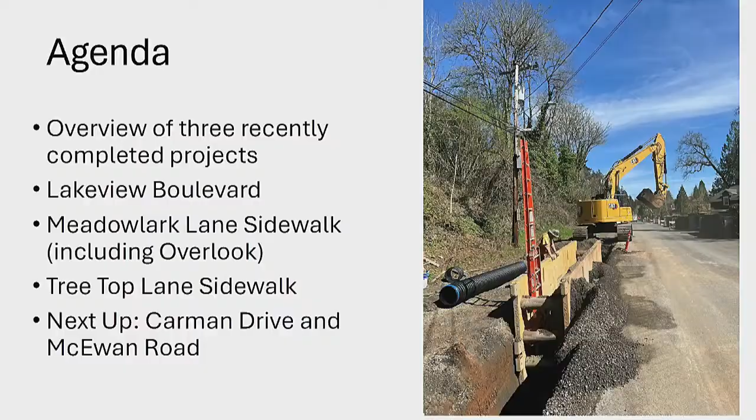These projects align with City Council goals and community priorities to improve transportation connections, mobility, and safety for all travelers and all types of trips in Lake Oswego, with a council initiative to continue construction of sidewalks and pathways, focusing on safe routes to school. Based on that, we are here to present a brief update of what we've accomplished last year.

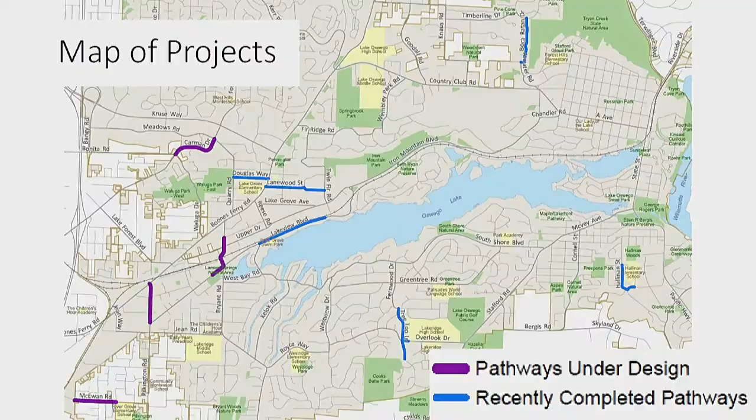Let's jump right into Lakeview Boulevard. This project kept us on our toes for most of 2025. The project was fully funded in our capital improvement plan with funds coming out of stormwater and street funds. We started design in 2022 by hiring an engineering consultant, Consor. The project extends from South Shore Boulevard to Iron Mountain roundabout. The full scope includes nearly half a mile of new concrete sidewalk, close to 1 mile of reconstructed roadway, new stormwater pipe, catch basins, and a new stormwater treatment system.

Almost exactly 1 year ago, we hired a contractor to construct the project. The contractor was selected based on lowest bid, COBID points, and additionally demonstration that they were qualified to handle a project of this magnitude, to ensure timely completion before the start of wet weather. Knife River was the winning contractor.

Before we get started with pretty pictures, I need to mention the importance of consistent communication and outreach to the public.

This project in particular experienced constantly changing traffic patterns. Our communication specialist, Katy Kirkman, kept local residents and the public well informed via targeted outreach to directly impacted folks, but also via public service announcements, done via email, phone, social media, and Lake Oswego newsletters. Project and construction activities were also posted on our project website. We had to coordinate with the post office, Republic Services, school districts, swim park, fire, and police. Contractor coordination also often included managing large parties some residents had, and weddings, which wasn't always easy.

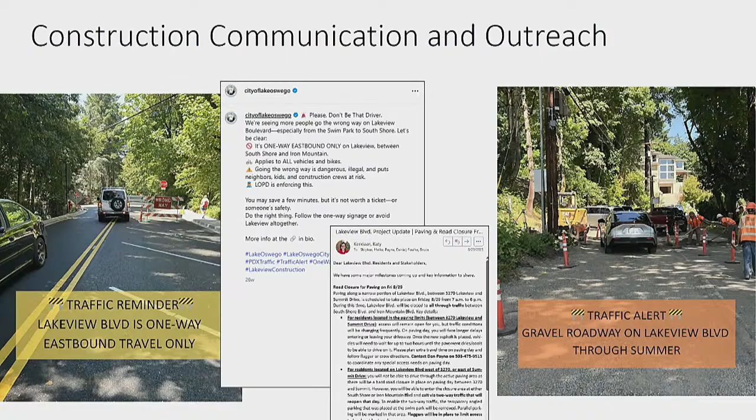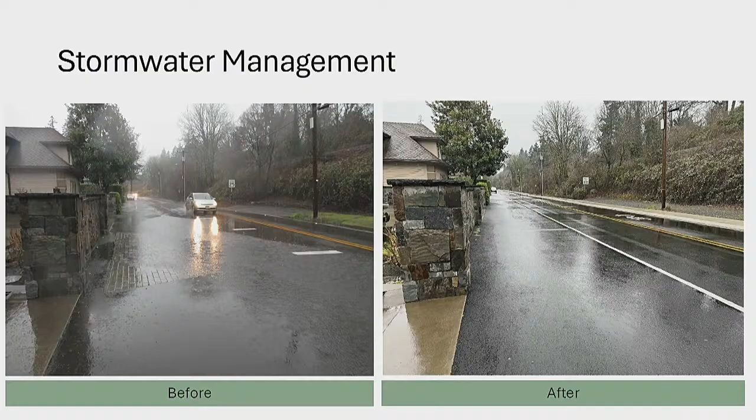But we made it. While a lasting pavement surface was one of the major objectives of this project, stormwater management was the other. Frequent flooding of the roadway was observed prior to construction. The picture on the left shows an extra large puddle on a particularly miserable day. The new pavement surface, shown on the right, sheds away from the residences towards the sidewalk curb and catch basins. The catch basins then send all the stormwater to the newly constructed stormwater pipe, which then sends it on to our treatment facility, shown here.

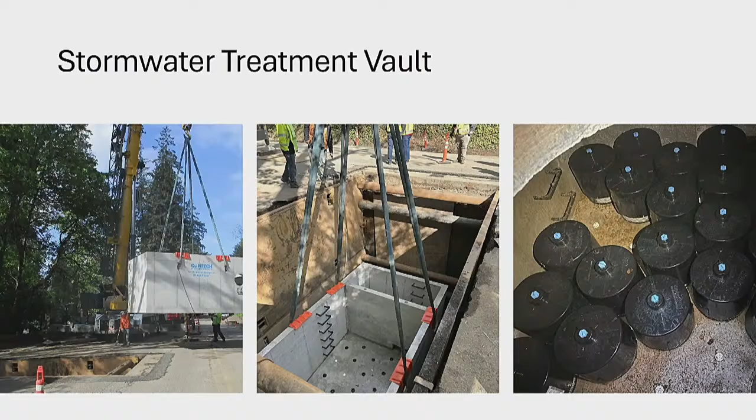This stormwater treatment vault was placed in the parking lot underneath the Lake Grove Swim Park. A large crane was used to lift the stormwater vault into the 16-foot deep excavation. Lakeview had to be fully closed during setup of the crane and installation of the vault for about an hour and a half, and this had to be fine-tuned with resident schedules and school traffic buses.

We then placed 21 storm filter cartridges to ensure that the water that will flow into the lake is treated prior to discharge.

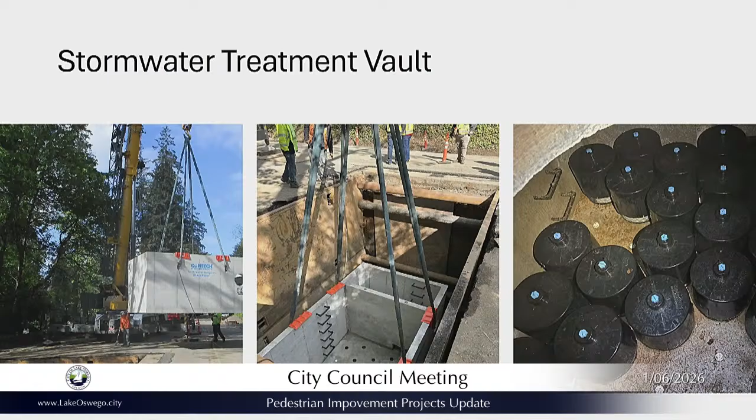Do you have to change those cartridges every so often? Yeah, our stormwater crew will have to. But I made sure they have a little extra headroom in there, because often they don't have headroom. It's like 4.5 feet tall, and they have to climb in there. Wow.

Approximately half a mile of new sidewalk replaced the former shoulder walkway, and a new raised, more visible mid-block crossing at the Lake Grove Swim Park improved safety for pedestrians, especially during the summer swim park use.

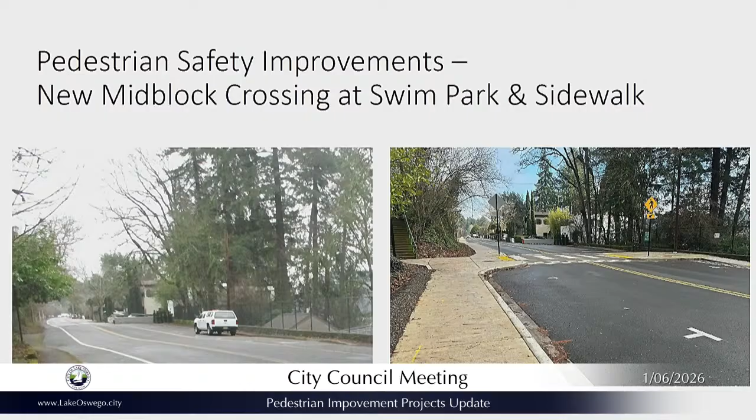Originally, we had hoped to provide a sidewalk throughout the entire corridor. Unfortunately, this was found to be infeasible. Therefore, the sidewalk ends at the Gooden easement. The design team came up with some smaller scale solutions that improved overall conditions. I'll show you some of that, but these solutions included trimming vegetation, removal of roadside hazards, and adding signage and pavement markings.

One of the challenges of the project was the curve safety improvements, which you can see in these photos. First, the challenge started out with a legal agreement allowing the permanent alteration of the adjacent property due to the required removal of a large Douglas fir tree.

Thanks to the council directive to further look into this matter and see what it would take to remove the rock outcrop, we were actually able to add the scope during construction, after reaching an agreement with the homeowner. It took some extra time, but in the end, we were able to remove a couple of large trees and bedrock to allow for some extra shoulder space for pedestrians to get through this narrow area.

Residents had to endure the noise and sometimes vibration of the equipment during rock excavation. We also added some striping, profiled high reflective fog line and reflective pavement markers throughout the corridor for better visibility at night.

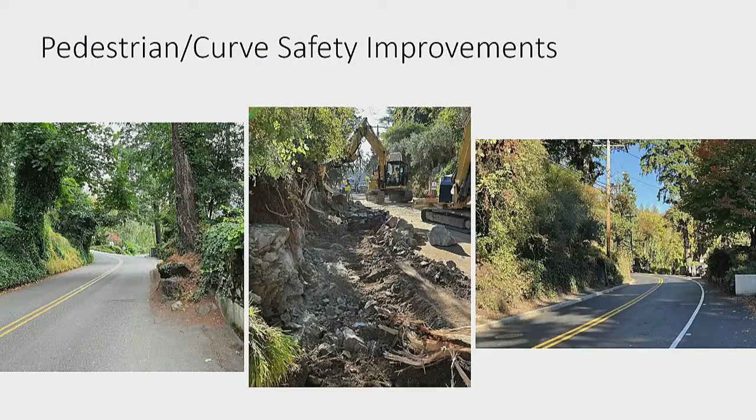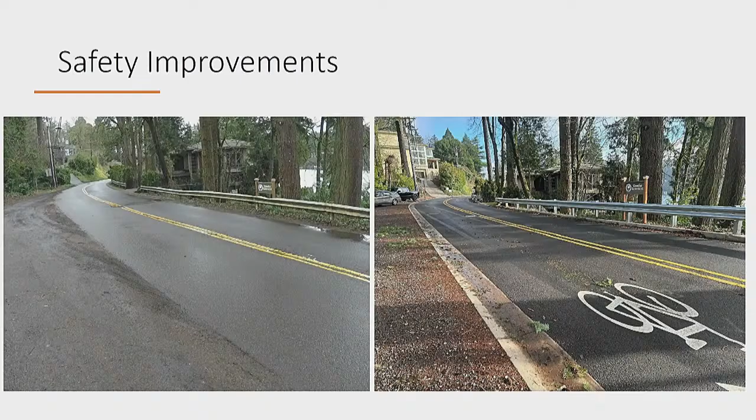We replaced the old guardrail at the Gooden easement, which proved to be challenging due to boulders serving as a retaining wall adjacent to the Gooden walkway. Curb was also added to the roadway to direct stormwater into catch basins.

Here's some final project statistics. Total construction cost was $4.8 million. We added about half a mile of new sidewalk, 8 new ADA curb ramps, nearly a mile of new pavement, 3,630 feet of new stormwater pipe, and 25 catch basins.

We managed to do some improvement at the railroad crossing. That held us up for a while because the railroad initially proposed that they would replace the crossing with a nice concrete crossing, but in the end, they proved to be too busy to follow through with that.

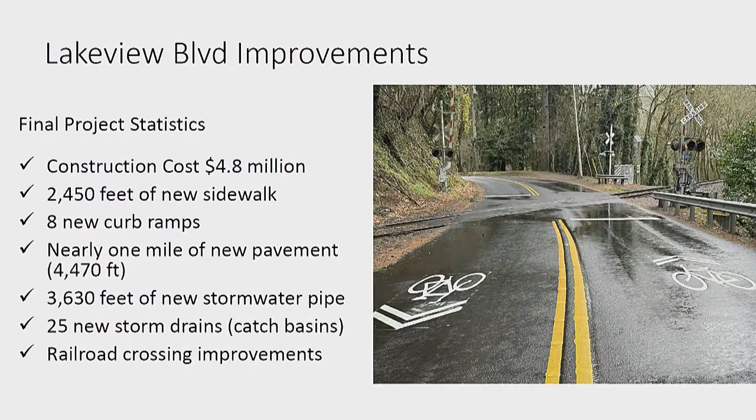Let's move on to our treetop and meadowlark sidewalk projects. Both projects were fully funded in our CIP, Capital Improvement Plan. The goal was to finish the upper part of treetop before the beginning of school. We also added a short 200-foot section along Overlook Drive after our first public meeting, where we got feedback that the connection from Meadowlark to Overlook was really a missing gap, so we added that as well. Total length of sidewalk on treetop was approximately 1,400 feet, and Meadowlark and Overlook was almost 900 feet.

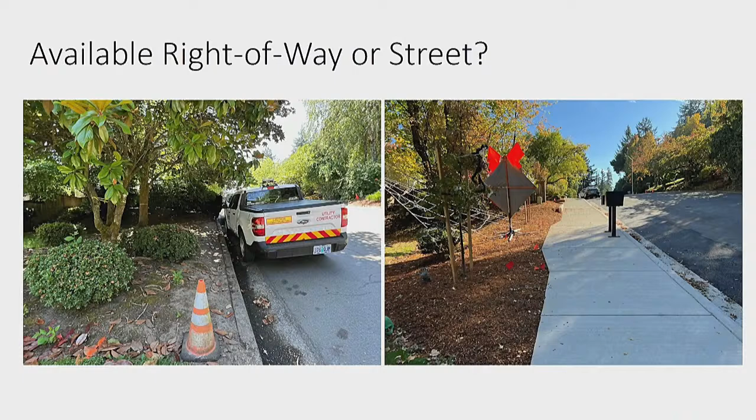Before I dive into some project photos, I'd like to briefly talk about how these projects get started. One of the first decisions that needs to be made is where the sidewalk is going to go, and whether we have enough right-of-way. We first meet with the public and affected residents to hear their observations and key concerns, and try to incorporate their feedback as much as we can. The general public perception is that the property line starts at the existing roadway, and there's often confusion that requires education. Going into the street or towards the property also depends on street classification, and often the need for parking.

Here's some photos of the treetop sidewalk before, after, and during. We ended up going into the street because of existing utilities and the large impact on existing driveways and front yards and properties. Stormwater also became more of a concern, and streetlights would have to be moved, so we went out into the street.

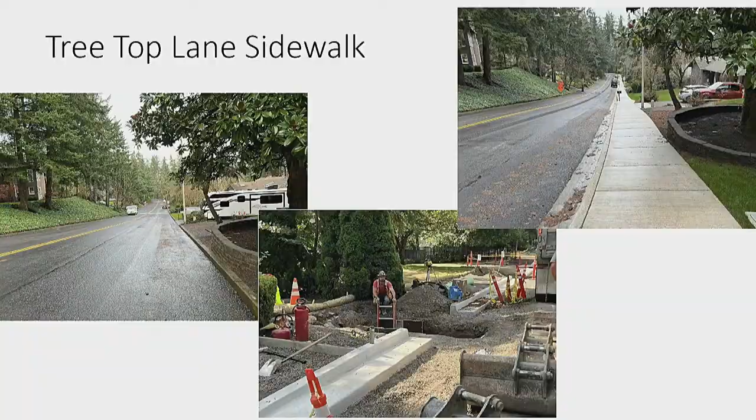Construction work is full of little problems to solve each day, whether it's how to keep access for electric vehicles to charge while the concrete is curing, or make sure guests of an Airbnb have unrestricted access. During this project, we had some last-minute changes in plans to accommodate those cases, electric vehicles and Airbnbs, and so our contractor always needs to be flexible, pouring driveways in 2 halves to ensure that. You can also see in the picture on the right that driveway required extensive brickwork, and it also has exposed concrete aggregate that needed to be matched, which caused quite a bit of delay and sometimes frustration, but it all worked out great in the end.

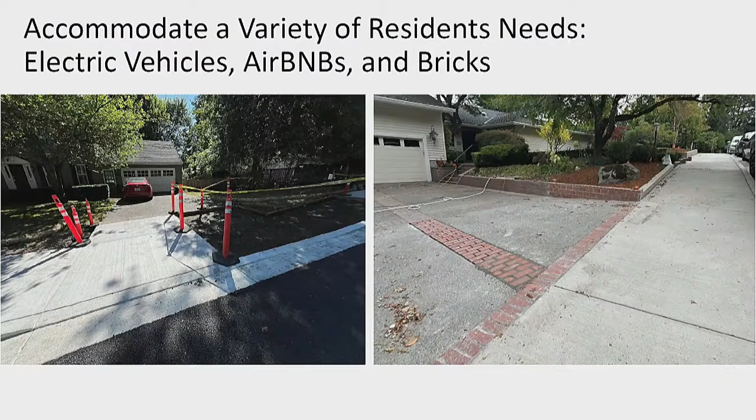Your microphone. They need their charger at night, and concrete takes about a week to cure. So when those people can't access their charger for a full week, they have a problem. Got it.

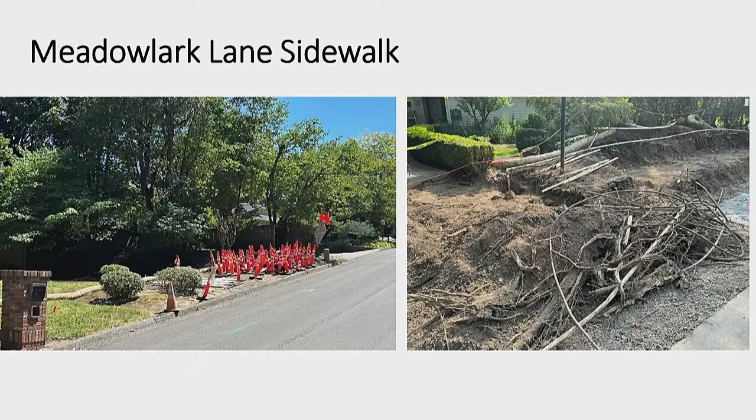These photos show that construction can be messy and disrupting, and things might temporarily not look pretty. The photo on the right shows demolition, tree removal, roots exposed, broken irrigation lines, broken water meter line, everything happened there. You can faintly see the orange line in the background - that's a Comcast cable that was exposed, but that's reality.

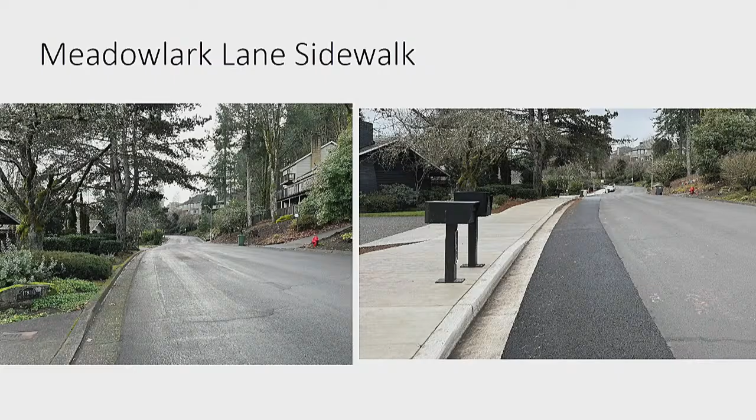Here are a couple of before and after shots of the sidewalk along Meadowlark Lane. The sidewalk was constructed going toward the residents. A priority of the neighbors was to keep as much street parking available as possible. Along Meadowlark, we still have mostly parking on both sides, except in a small area where the sidewalk bumps out into the street to save a large ponderosa pine and ancient Japanese maple tree species. As previously discussed, an additional 200 feet of sidewalk was added along Overlook to close the gap. This ended up being a great addition to the project - it's really my favorite there.

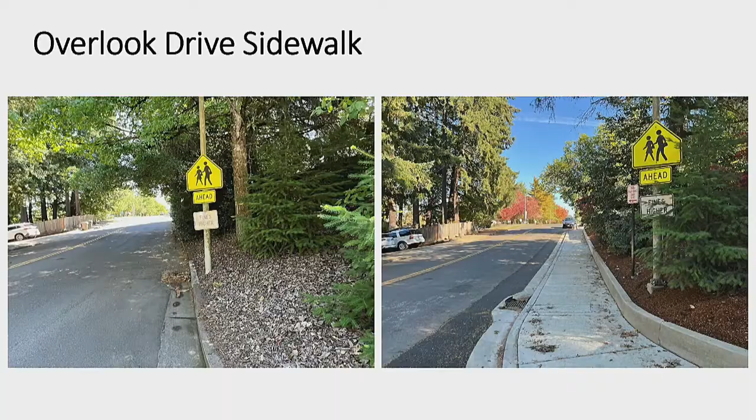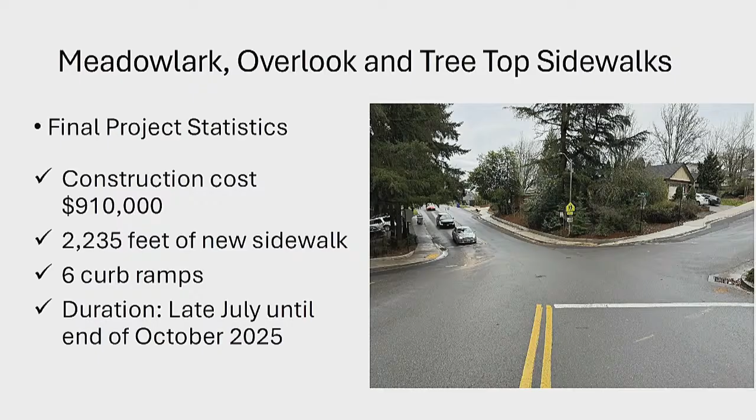Final stats: construction of all 3 segments was just under $1 million. All in all, it was nearly half a mile of new sidewalk, 6 curb ramps, and we got that done without impacting school traffic too much.

Next up, Carman Drive, Pilkington, and McEwan Road. We have just selected a contractor for the Carman Drive sidewalk construction. This will be on the consent agenda for approval during one of the next council meetings. Pilkington Road sidewalk should be completed later this year - there we were being held up by a property dispute and dedication. And the design for the McEwan sidewalk near River Grove Elementary is being finalized, and we anticipate construction this summer.

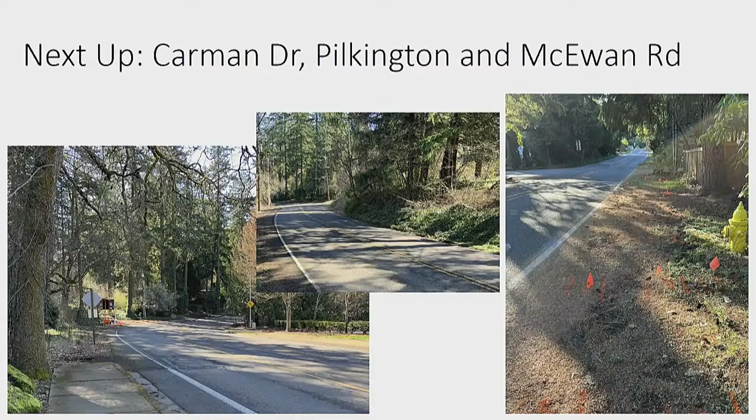Thank you very much for the presentation. It highlights how much, in addition to the complicated construction work these projects entail, there's also complicated and involved communication required. I want to tell you we hear very little from residents, which is a good thing, and what we do hear is very positive. People are very positive about these improvements in their neighborhoods and the cooperative way that you work with them. People really appreciate it, and it goes a long way. Thank you very much.

I'm curious, have we been working with some of the same contractors on these projects, or has it been a whole variety? We have worked with Turney now 2-3 times out of 6-7 projects. Other than that, it was always different ones. And now with Carman Drive, we had 16 contractors bid on the project.

Wow, they're hungry. Is it ever helpful working, as we're doing these projects every year, with the same people? If they're a good contractor, then yes, it's helpful, and Turney does an amazing job, and they know our expectations. It's nice to have a contractor who is really accommodating because residents come out all the time to talk to them about this plant or this going on, and I think it's good for them to want to listen and be respectful and always kind.

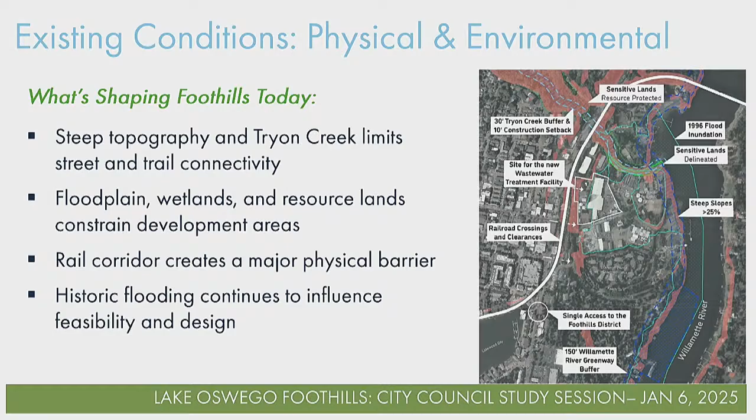And flooding, the 1996 images are amazing to look at and see the extent of how far that water reached, primarily coming in from Tryon Creek, not the Willamette flooding over into Foothills, but working its way near the wastewater treatment plant. These are really good datum lines and points of reference for us. What's shaping the Foothills today?

The limited access is a real challenge. There's one way in, one way out. It's been that way for a long time, and that has some issues as we think about development long term. Emergency access, the ability to get in and out, access not only to the park but also to future development, needs additional access to really be a viable development area.

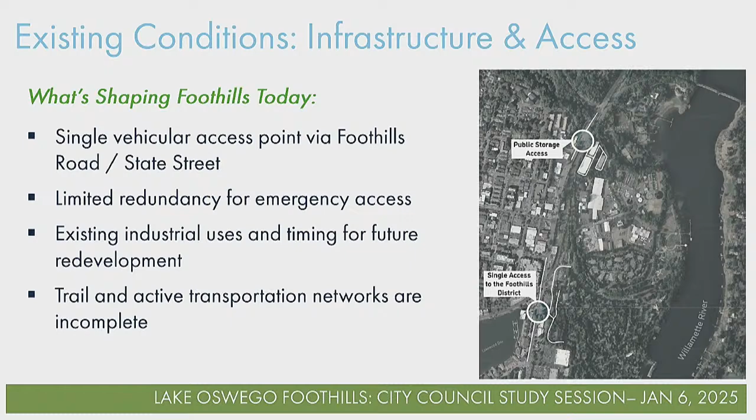I think the trail and active transportation networks are one of the most exciting things because you've done some of the work of acquiring those additional right-of-ways to connect George Rogers to Foothills Park. So I feel like that's already a trajectory that's a real positive. We're hoping to feed more into the walk-bike connections that feed not only along the river, but between the river and downtown.

We've also interviewed a number of developers. This is to give a perspective of the type of development that's potentially viable in downtown. You've had a lot of great projects happen along First and A. The Anchor project is another one. So these are indicators of what the potential market might be, and it gives us a sense of scale and the type of development that might be in the community.

And so what we hear from developers, it's not new now from probably 2012, but the access improvements are going to be really important for redevelopment to be attractive in the foothills. Having good access points in and out are important. How the floodplain is addressed, how that's mitigated, whether it's fill, having a clear path for that is going to be important. And then the infrastructure costs, how much of that will be on the development community, how much might be a catalyst project that the city can initiate. So understanding those parameters are important from a development perspective.

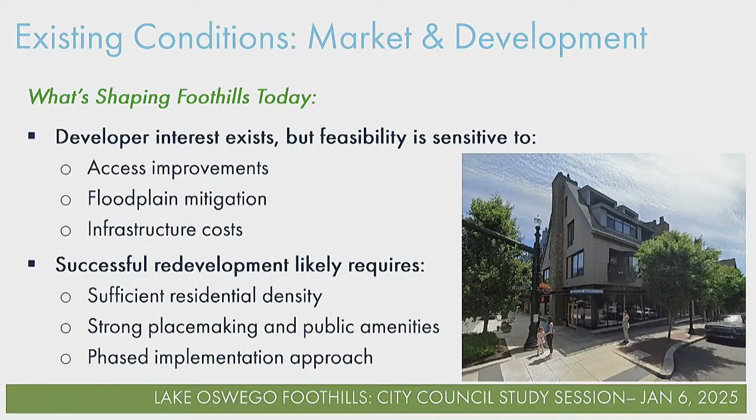And then, of course, as we think about density and intensity and types of development, you're poised for increased density in this district. What that is to be determined, but we know housing is also an aspect of that. And with housing, placemaking becomes really important because people want to be in a place that's desirable. Mixed-use development, if that's an opportunity, what we're hearing is it really needs to create the riverfront as a destination. So even if there's a limited amount of commercial, having it river-oriented, river-facing, having housing development river-facing, having Foothills Park be a part of the experience, all those parts coming together are going to be critically important for success. So what limits redevelopment potential?

I mean, I can talk about access all day. You can see a number of arrows here where we've been looking at potential ways to come in and out of the district, whether it's through existing uses or aligning with Terwilliger. The wastewater treatment facility is moving from one location to another, and so we've been testing sort of paths. Is there an ability to weave between the new and the old facility? So those are considerations for us.

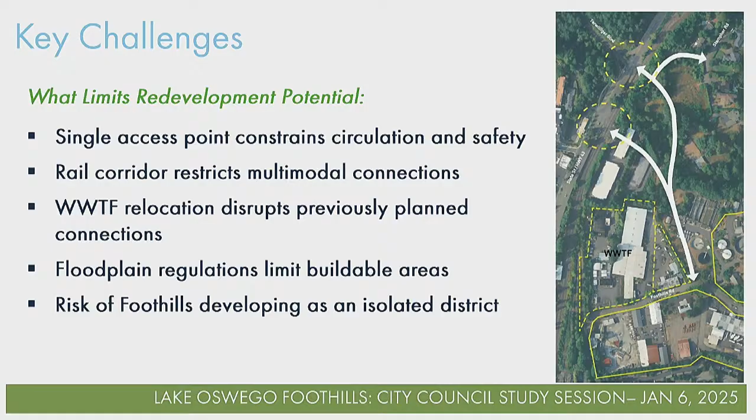And I mentioned floodplain, buildable areas, and this access thing is going to be really critical because we can't really have an isolated district. There's always opportunities. The secondary access would be great.

Can I ask a quick question? Sure, absolutely. So, John, go back to the previous slide, please. So are those real possibilities, or is that dreaming?

Well, everything's a dream, pretty much. Yes, everything is cost. Cost will play a factor. There's a number of constraints here. The rail, we'll say that's fundamental. You do have a crossing today on that lower arrow going through that white building. That feeds to the public storage units today. You don't have a connection at Terwilliger that you see in the other arrow. But the trade-offs are like, what are the benefits of one location versus another?

So the 2012 plan said, let's go through the path that's through the public storage units. So that's an acquisition of property and trying to weave a road through that. That's at grade, so the rail line and State Street are at the same level. So from an engineering perspective, that's pretty good. But then you have the cost of purchasing property and weaving your way through. What Terwilliger does is it aligns you.

The other issue with the potential public storage location is it's between Terwilliger, which is a signalized intersection, and D Street, and it's in between. So it's a little complicated to get a new signal in there so we can get in and out of the district. It can be done, but it's going to cause some other streets to limit access, right-ins, right-outs, those types of things for the Terwilliger intersection to work.

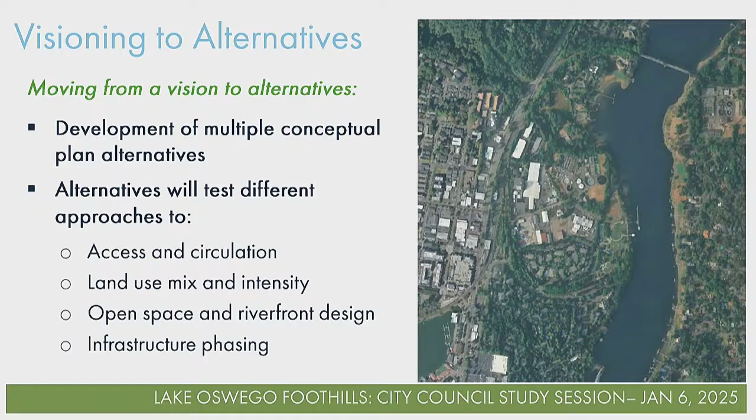That's really outlined there. As we move from vision to alternatives—I've mentioned the vision, I've mentioned the guiding principles—we'll be using that to create conceptual plan alternatives. That'll include additional access, a road network, mapping along property lines and existing businesses, and determining opportunities for a variety of land uses: housing, some commercial, expansion of Foothills Park. All of those things will be part of the scenarios we'll be developing. By the end of March, around April, there'll be some great viewing time for those initial scenarios.

I guess I should begin by asking if there were any questions about the initial presentation from Jason, anything we talked about, the general overview of some of the recent work we've done, and the findings from our inventory and analysis work. Are there any questions before we get more in-depth here? No, go ahead. Okay, keep going.

Thank you. As Jason pointed out, we have about five different topics we really wanted to focus on with you today, thinking about how to best utilize your time rather than just reporting out what we already know about the district. We've already been through a large process as a city, at least 10, 15 years ago, that a lot of us are familiar with. But there's extensive reporting for you to review—a very long set of technical documents that we've distributed along with your packet.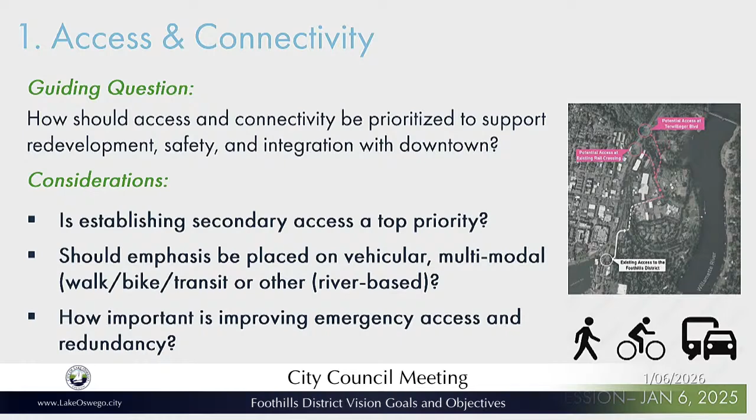Of course, the primary question—if not one of the primary questions, potentially the primary question—is how should access and connectivity be prioritized to support redevelopment, safety, and integration with downtown.

This might be somewhat of a no-brainer, but we want to be clear that this is a priority before we move forward, because it will have an impact on the visioning we do eventually for this area. So the first question is: is establishing secondary access a top priority? Do you have any thoughts you can share on that?

You feel the advisory group so far feels pretty strongly about this secondary access being key? Oh yeah, I don't know how you could do it without it. Okay, great. But I also think some of these might be so obvious as to not require much conversation, and I think that's a good thing.

It's obvious if it's $150 million, it's pretty obvious we won't be doing it. Yes, we'll get to that part. Let's go through conceptually, if we're dreamers. Yeah, we'll get to that. Let's get through this, and then we'll want to transport back in time to when we approved the RFP for this project, and you told us all to dream big and not be too weighed down by that.

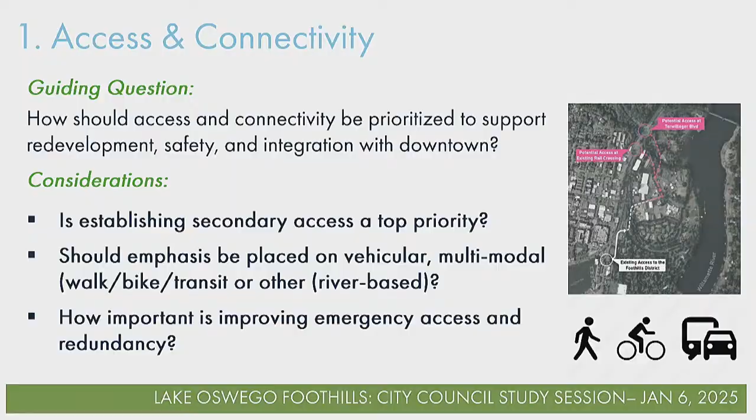Yeah, I think it's really important that we have that access, and I think we're not going to see vehicular access through like A or B. It's going to be on the north end, so we need some pedestrian access that really connects the main downtown with foothills. In addition to the trails, which are fantastic, we need that flow of how people get down there without always using a car. So how do we really focus on that?

I think in 2012, didn't they have like a stairway or something? Yeah, there was some sort of Spanish Steps inspired entrance. I don't know if that's right or not, but I think that's critical to bring the flow of people between the two areas.

Yeah, it has to encompass one flow of the two areas, so that it's a whole. You wouldn't want to have to park down there to go down there and park up here for another thing. You can park here and it's one experience.

We're going to talk next about economic development strategy, but one thing that came out of that is improvements to B Avenue with the North Anchor project. So how does that tie into these improvements, and how do we create this one experience? Because we didn't do a lot of pedestrian improvements to downtown, aside from some streetscape. So it's one of our trickier connections in town for bike and ped connection. And of course Highway 43, the one state-owned highway going through town, adds jurisdictional issues as an additional challenge. So it's foothills, but then also a few blocks into the downtown.

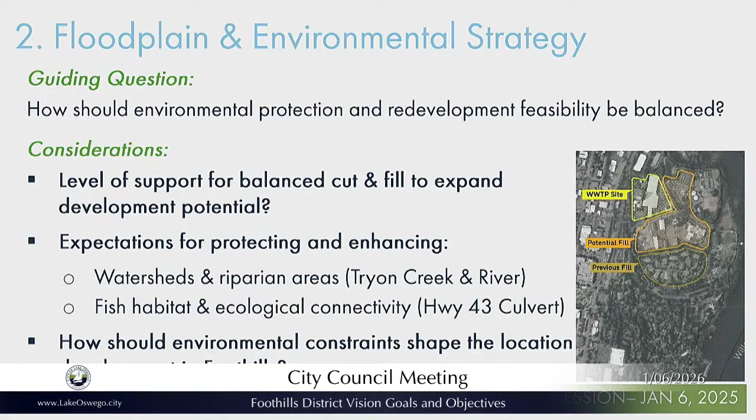Yeah, so the cut and fill concept is that flooding needs somewhere to go - low-lying areas - and as you take low-lying areas out, you're exacerbating the flooding issue. You could put in a wall, for instance, but that would back up and cause other issues. The wastewater treatment plant itself, the area we're relocating it to, a portion of that is out of the floodplain and some of it is not, so they'll need to level that surface and put some fill in.

What we found is that previous work done on Foothills Park lowered the park and created a larger area for flooding to move into that zone, increasing capacity from 1996. The wastewater treatment plant is going to use some of those balanced cut and fills as they level their area - there are credits given by Foothills Park for that. As the old wastewater treatment facility moves, we have this mound, some of which is bedrock, and that's a location where we can take soil to create more flood capacity, putting that fill into another lower part to raise it up.

The image on the wall, which you probably have in front of you, is a good example of the cut and fill. The previous fill, the Lake Oswego Point condominiums, is all area that was raised up four or five feet for that housing project. That was outside of the flood in '96 - they were high and dry, which is great. It's a similar concept. In that yellow area between the previous fill and the wastewater treatment site, those are the areas we're looking at bringing in fill, because that would be your redevelopment area outside of the floodplain - not all of it. That yellow line goes up toward Tryon Creek, but we wouldn't be moving that far.

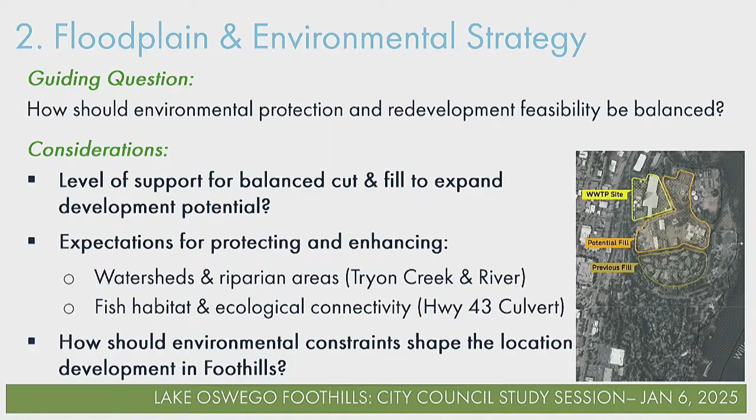So, sorry, too much information. What does cutting where the current wastewater treatment plant is do to the developable potential of that land? Well, you can put some soil on, let's say, the west side to create more of a cone, and you can carve off a side, compress it down, and move soil around so you can create a more contiguous level flat surface. So some of it's just manipulation of something that's conical to have more of a flat surface.

But as I mentioned, bedrock is something that's underneath. Doesn't mean you can't work through bedrock — you can blast that out and create level surfaces from that. Does that answer your question, or do you have something more specific?

I mean, in the areas that we cut, like we did with Foothills Park, then we made that into a park. We didn't build there. You can't build exactly there, so some of that cut then may add more park area, and so the parks plan, which is looking at improvements to Foothills Park — absolutely, we want to look at how that additional cut can contribute to more park space at the same time, and give us fill for the development area.

For development, so, okay. So why would we not? I think this might be another one of those obvious questions — I think we really are strongly leaning towards the sort of district-wide balance of cut and fill, and that's kind of what we're proposing here.

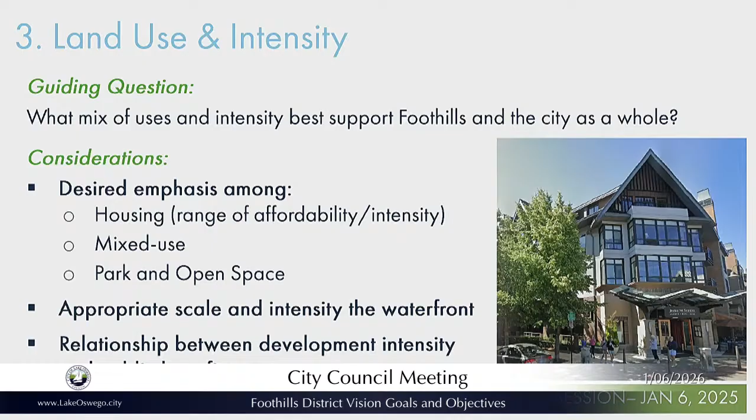No, the general plan is good, other than the fact that, since I've been in this community a long time, there is a shortage of houses for people who want to downsize. I think one of the desirable parts of the 2012 plan was the chance for a mini South Waterfront, though they didn't all want a 10-story building, most people didn't, so things kind of changed on that. But the supply and demand issue is something we're very short of in this community, having a place for people to give up their bigger houses so we can get more kids in the community and get that rotation going, because there's just not a lot of options for people who move.

I'm all for the affordability part too, but we also have to have that element of high-end or higher range opportunities for people to sell their 5,000 square foot house and downsize to a 2,000 or 3,000 square foot condo. It's all proportional in people's minds, but it's highly desirable for a lot of people in this community. We need to be the planners and thinkers, because we're not building as many houses since we don't have the space.

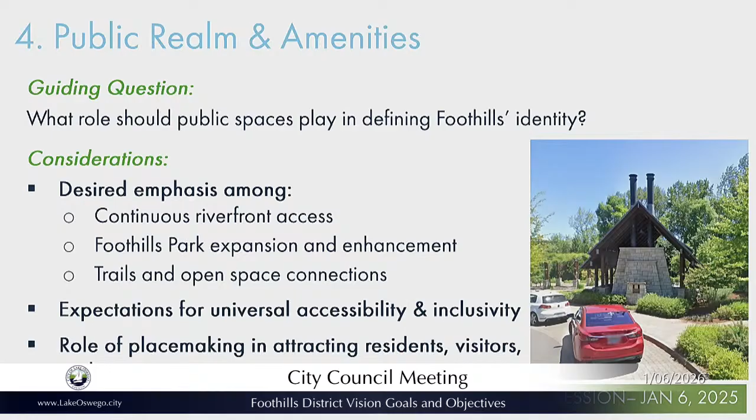And what's that? Okay, yeah, I think we're on the same page here. Yes.

Just talking a little bit more about implementation. Again, this is something we'll consider a lot more in later phases of the project. But as you can imagine, because this effort is being led by the city and not by a group of property owners getting together to spearhead it like last time, it's difficult to anticipate exactly when and how development will unfold in this area once the plan is adopted.

So really, what we've landed on is that there's almost a need, but we're calling it a preference, for both a phased long-term build-out and early catalytic projects that get some investment in the area for infrastructure to start being constructed and to actually finance that piece. It would be great if we had a giant development site ready to go, but this will take some time, particularly with that public storage site on the north access being critical to unlocking a lot of what occurs elsewhere in the district.

So I think we know we need to try to balance these things, and we're looking for your confirmation of that. With the development of the urban renewal plan, we're talking about the types of public investments needed to unlock private development in that area, and different, more flexible approaches. We know we need to be flexible, but there's this question about the sequencing of public investment in this area.

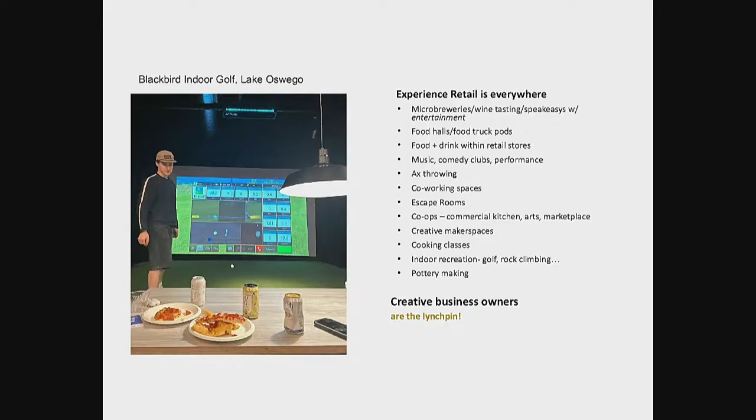Even though the retail base is very vocal in our community, it's relatively small. Of the whole private sector employment base, it's a little over 5%, about a little over 1,000 employees.

Growth and change in that industry is always driven by population and income. Note, e-commerce is increasing, up from 12% in 2020 to 16.3% today. That has had some slight impact on retail demand, but not significant, not in our community.

The space use is changing. You've noticed this. We have an incredible number of personal fitness firms and health-oriented businesses. Restaurants still dominate, which I think is good because they are anchors that will not get lost to e-commerce.

New investment is occurring even with the limited supply of space we have. Only less than 2% vacancy rate is considered full occupancy in most markets. So that's what we're looking at for commercial sites, commercial space.

I'm going to keep going here. I will note that in talking to businesses, they're getting nervous about the economy. The holiday season wasn't quite as good as they had hoped. Foot traffic is probably at the top of the list of retailers. And of course, a lot of issues you've heard before, everything from parking and signage to code enforcement.

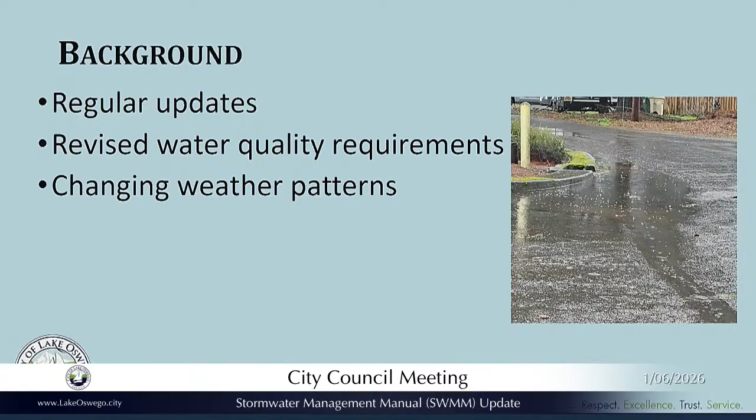When we started this project a couple years ago, we came armed with a list of comments and changes that staff, engineers, and developers had wanted in the manual. They were looking at inconsistencies, things like, I can't find this in the manual, where is it?

And so when we started, we came with that list, and then we hired a consultant to look at what's being required area-wide within the Portland metro area and even into Salem and Eugene, so that what we were asking wouldn't be too onerous for developers and engineers. They would be used to these kinds of requirements and be like, oh yeah, we do that in Portland, it's fine. Or yeah, Clean Water Services makes us do that.

And then we have a great staff. We formed an internal team with staff that has experience in geotechnical areas. We have staff with stormwater expertise, construction management expertise, construction expertise, and plan review.

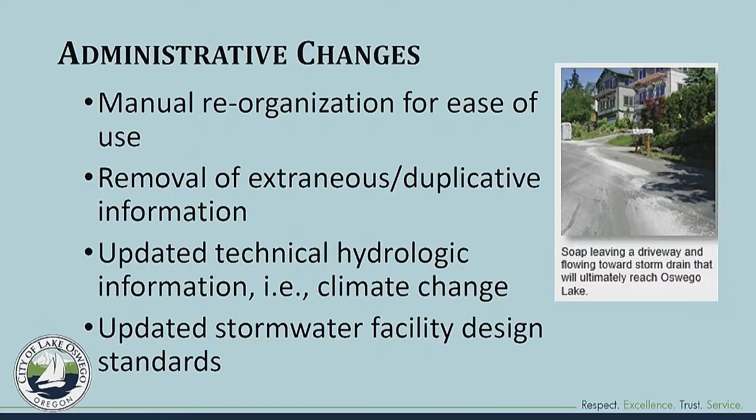Another thing that we did is that we had requirements that were in multiple locations with slightly different language, and so people were coming up with inconsistencies. We took those requirements that were in multiple locations and put them in one location, so you have just one requirement, as opposed to going, well, it says this in this chapter and this in this chapter. Now it's in one chapter in one location, and it'll reduce those inconsistencies, which will make the design faster because people understand what they're being required to do.

The 2025 numbers are based on the last 30 years of local weather station data. We used a station that Portland has in their hydro network up at Nansen Summit. The 2020 numbers, the 2016 numbers, and the 2000 numbers all used data from NOAA, and that data was last updated in 1972, using precipitation data from the 1940s, 50s, and 60s. So things have changed a little bit, and we wanted the latest data to deal with these changing weather patterns.

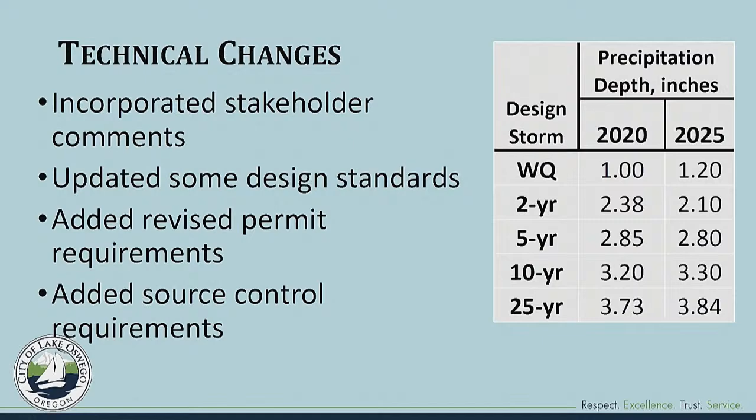There was one other thing I wanted to cover - we added source controls to the new manual. A source control is something like putting a cover on your storage area where you're storing waste materials or raw materials, so precipitation doesn't hit it and become stormwater that goes into our system and into our streams and our lake.

The impact we see this having on engineers and developers is that these larger projects, the 10,000 square feet or more - which when we did the analysis is like 10% of the projects per year - so the vast majority of projects done in the city won't have these increases in design analysis to make sure they're not affecting the adjacent property owner and not adversely affecting our public system because of the water coming off their site.

We'll increase our water quality here in the city because of the treatment required prior to discharging water off-site, and that's actually a DEQ requirement in the latest stormwater permit they handed us. They said all the water that comes off a site needs to be treated before it gets discharged, so we put that into the manual. It'll improve water quality, meaning less sediment going into Oswego Lake. Last summer we had concern about an algal bloom, generally caused by sediment and phosphorus in the sediment. It's kind of a vicious circle - once that sediment gets into the lake, it constantly recirculates that phosphorus. So we're hoping with these new changes there will be less sediment entering the lake and our streams.

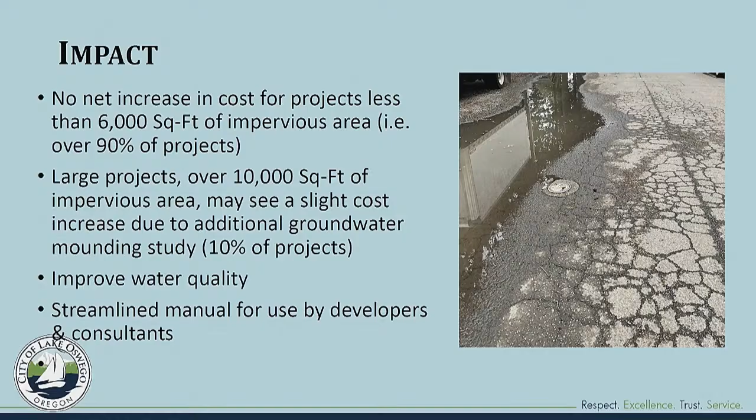The next thing we're going to do is implement the manual, and we're going to do a reverse of what we did with the comment period. We're going to send a focused email out to engineers and developers that have done projects in the city within the last 8 years. We're going to put a newsletter article into Hello LO and LO Down and the Chamber of Commerce. Internally, we'll refresh the memory of staff who don't deal with stormwater every day, and even those who worked on the manual, since it's been a while since we all got together and talked about the changes occurring.

And then we'll always be available - voicemail, email, in person - and we have that online comment form if people just want to dash a quick note off to us, and we can answer them that way.

With that, I'd like to ask you if you will let the city manager sign a letter that approves the recommended revisions as allowed by our municipal code. Okay, thank you, Ms. Johnson.

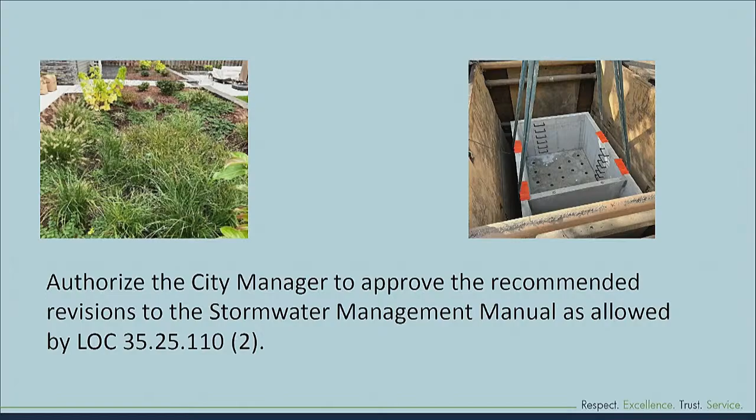I have a question. I know in these updates you're talking about looking at infiltration downstream and changing the parameters there. As we've added more of these vaults and rain gardens, doing more on-site filtration, especially when it's not on-site but a public vault or garden capturing a higher volume of stormwater from the road, how do we know it's not infiltrating underground into people's properties, basements and things?

There's a software called MODRET. It analyzes when water infiltrates from a rain garden or a StormTech chamber, models where the groundwater table is, and how the stormwater coming down flows and enters that groundwater table, or hits a clay layer and spreads out. The software's primary purpose is to model what that infiltrated stormwater is actually doing, and it can say whether it's going to come out onto an adjacent property owner.